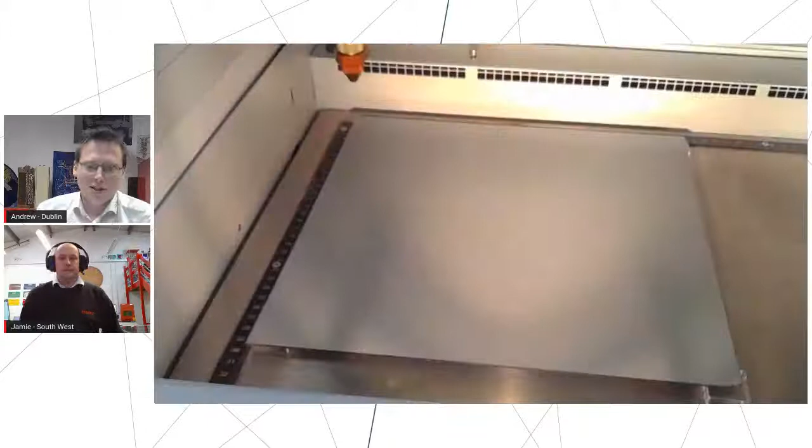Started from the beginning. So this is engraving of a mirror, using a CO2 laser at the start. This is the back of the mirror.

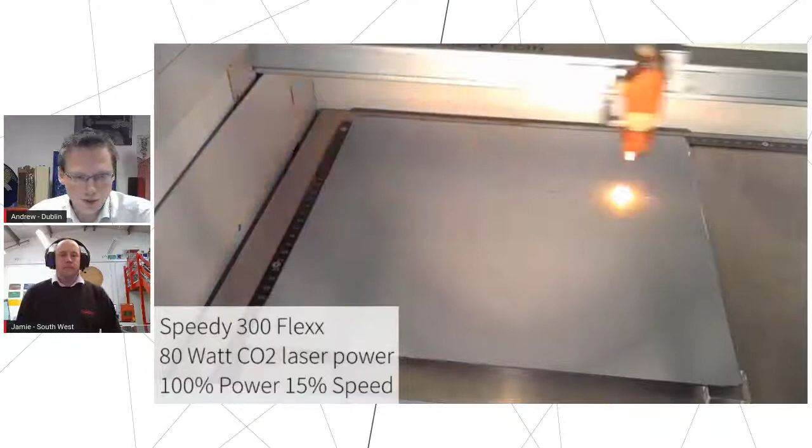Imagine we're trying to remove that surface of the mirror from the back, and then we're going to go through and create this frosting of the glass. There's a fairly big flash there, because I'm using 100% power in this 80-watt CO2 tube and 15% speed. We could probably go a bit faster if we wanted to, but you need to make sure that you're going through that material, because it might not be uniform thickness. So we're just making sure we're going through, and we're having a frosting underneath anyway.

So Jamie, do you want to talk a bit more about the other things CO2 lasers would be used for? Yeah, absolutely. We've run through the mirror here, quite a standard CO2 application - your normals, like Andy mentioned in the materials list, your woods, your papers, your cards. But really today we want to focus on the fiber side of things.

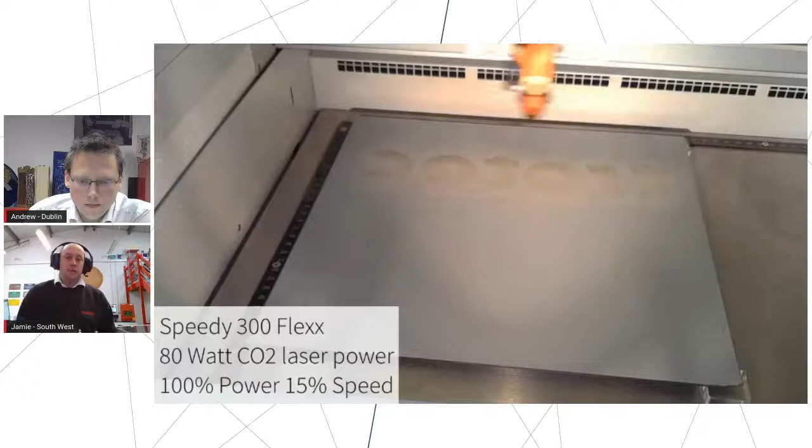As this runs through, Andy will talk through the fiber side of things on the mirror. The frosting on this mirror happens because we're actually marking the glass underneath the metal - we're using the CO2 at the moment to remove the metal content at the back of the mirror to give you a marking on the frosting on the glass. That might be desirable a lot of the time for backlit applications - you might use some LEDs to backlight it, and it gives a nice diffused lighting from the frosted glass.

So there you see it stopped, raised the bed up, and effectively it just turned the mirror over and told the laser to use the fiber laser source. This is using the same lens - a flexx lens - so it will work with both laser sources. You don't need to change the lens.

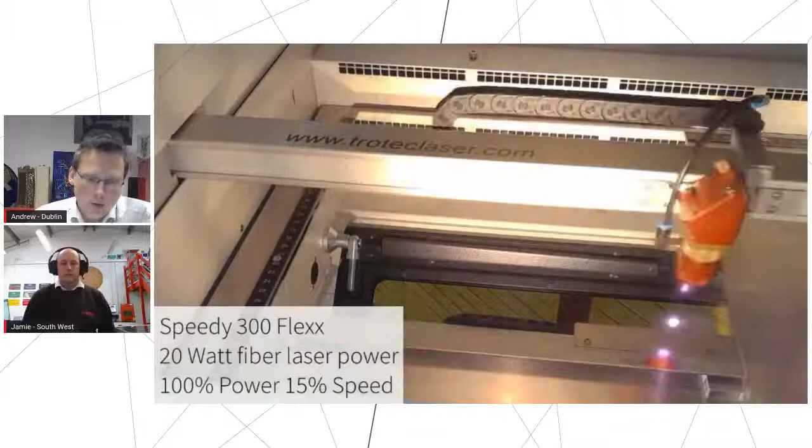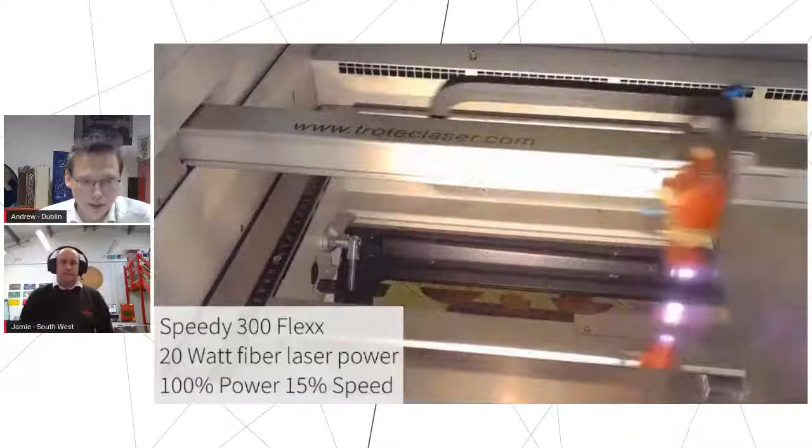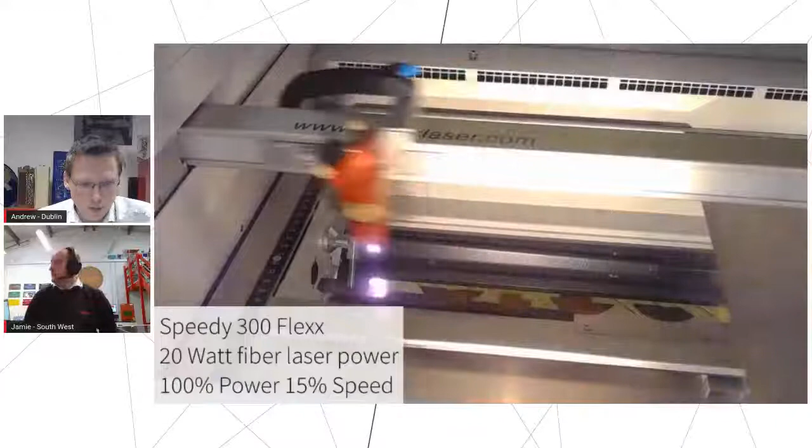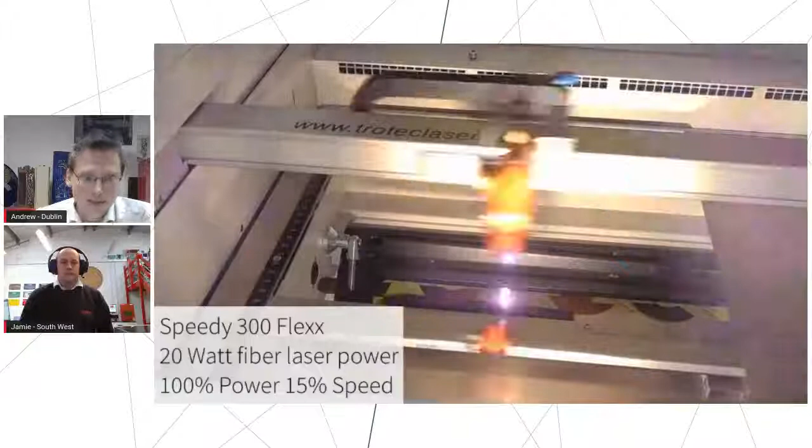With regards to the focal point, generally if you're working on the same height of material, you don't need to change the focus. The machine automatically knows the offset between the two focal points. But on this mirror, I focused it on the top of the glass. When I did the CO2 on the back, I was focusing it on the top layer to remove that metal layer. Whereas now that metal layer has sunk down about 2 millimeters below the glass, so the fiber laser basically doesn't do anything to the glass - it goes straight through the glass and reacts with the metal underneath. So we need to tell the machine to offset it.

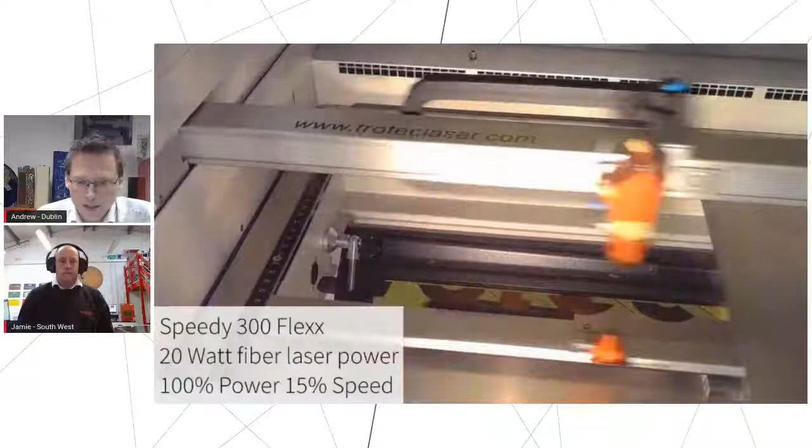But that's all done in the software - we don't need to change the machine or any of the settings on the machine, just the settings in the software change. You can see you're getting a nice big flash with the fiber laser. I used the same power and speed just because I thought it was giving a good result on this mirror - it might change depending on what mirror you're using. I think the only difference was I used 600 DPI on this setting instead of 500 DPI, just because it cleared out the metal layer a little bit better.

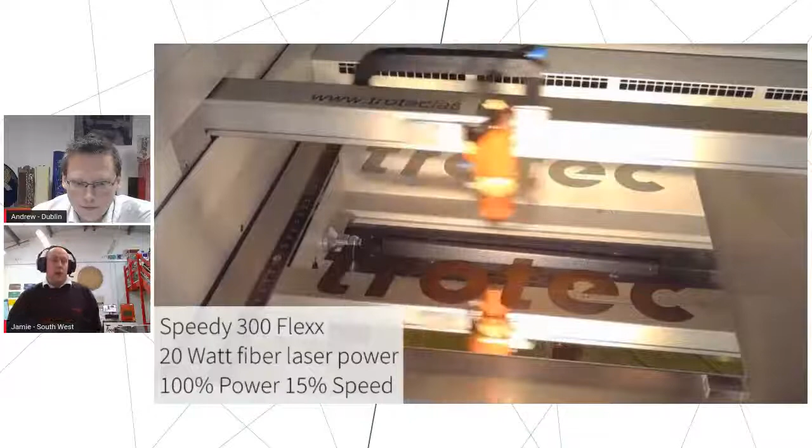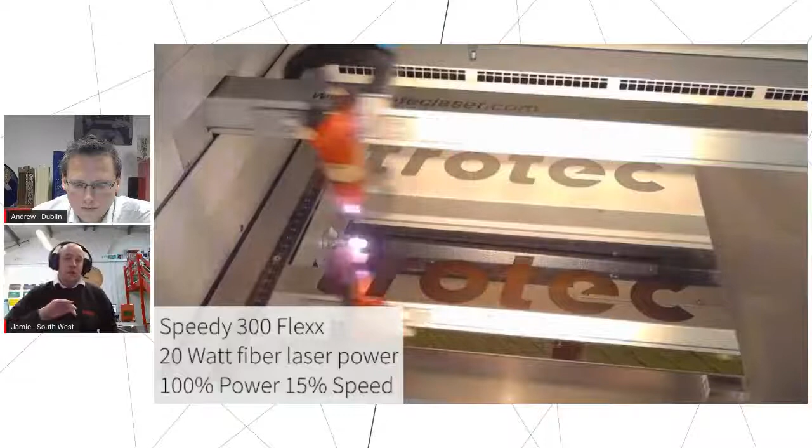I think Jamie, you were saying earlier that the fiber laser has a slightly tighter tolerance on the focus as well. Yeah, absolutely, fiber is really focus critical. As we run through something like this, the application is perfect to highlight that because we're actually going through the glass to remove that metal - that focus needs to be set at the right height to be able to remove the metal at the optimum point. So if you're doing other fiber applications, things like a polished chrome or stainless steel cutlery, where you might have just a slight curvature, you're really limited by the curvature at that point.

CO2 focal tolerances tend to be slightly bigger, allowing us to do a little bit more. So fiber is really, really critical on that focal point.

So I think this video is coming to an end. So I've got the actual sample here, I'll just stop that. There we go. So this is the one I made earlier.

So you see in the reflection there, you can see my camera. So the top part up here is the CO2, and then the bottom is the fiber laser. You shouldn't be able to see too much behind, you can see a little bit - sorry, it's more the wall behind. If I can show you, we're looking at perhaps these bits over here. You can't really see that through the CO2 laser, but you can through the fiber laser.

And usually, if I put my hand at the back, you can kind of see the ring on my finger there on the T. And if I bring it back, it'll go out of focus really quickly with the CO2. But if I put it on the T on the fiber laser, you can see the ring, and you can see it a lot further away - real nice clear finish, and real advantages for that going into if we go through.

Real advantages going through there would be things like if you're going to get paint fill. So if you're looking to add more value to it, paint filling. Also with the CO2 laser, you've got that frosting on the glass, so when you paint fill, you're going to have that frosting in front of the paint when you're looking through it. Whereas with the fiber laser, it clears all of that out nice and clearly, crisply, with a nice bit of paint filling on the back. Really highlights the quality - someone just doing a standard frosted CO2 engrave, being able to add that color really adds a bit more value to everything.

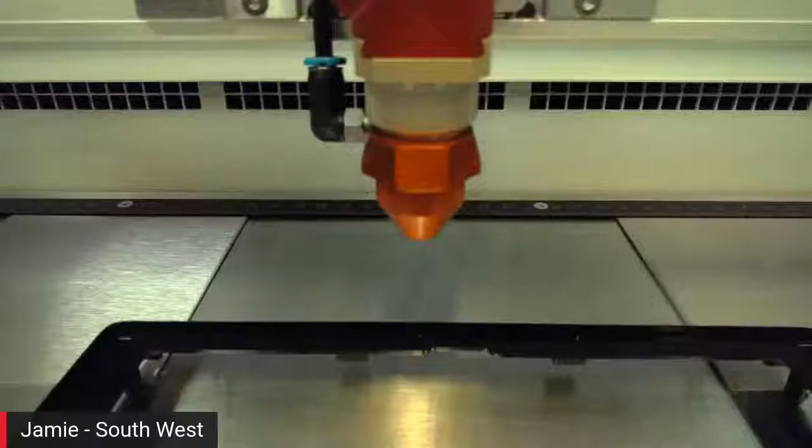So here we are, we're focused into our part. Like I said, I've got a little component part here that actually is part of a vehicle, so just a little part marking here, just for identification. So the laser itself, as Andy was saying earlier, we just have our standard Flexx lens, which is here, gold area at the top, which will allow us to run with CO2 and fiber.

So we just need to focus onto the material itself. Now I've used a manual focus here today, which we have the little tool that just sits on the side of the head, which I'm sure you've seen many a time on our webinars. And I'm just going to bring that material up till it touches our tool. And then from there, I'm just going to press play on our Ruby software, and then we're going to see the plastic being marked first off, like I say, with CO2.

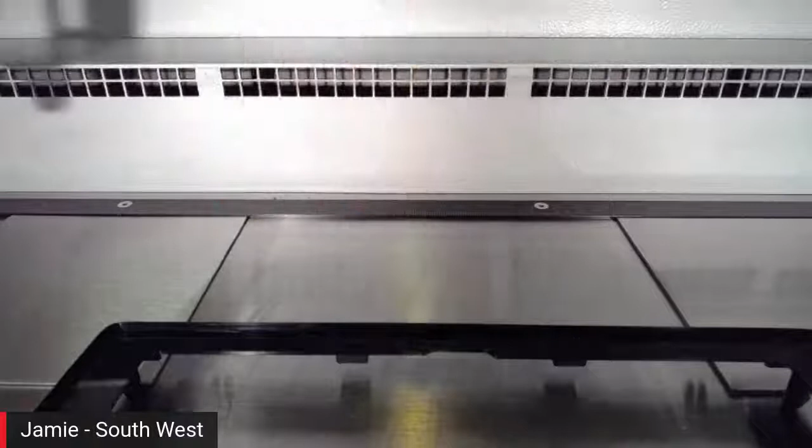And things like ABS here, this plastic really highlights the engraving differences between the two. So as it runs through, what we find is with CO2, it produces a mark that is legible - you get a slightly melted, rounded edge. And then with fiber laser, we're basically color changing that product. So if I lift this up first, you can kind of see if I get it in focus, no real color change - it's gone back to the same color as the plastic itself.

And then what I'll do is just move this across now, reposition - I want to be into this corner. And again, if I just share my screen again here, our job is finished, so our queue is empty. So we're going back into our design area, I'm going to move my job over now, so I'm on this position.

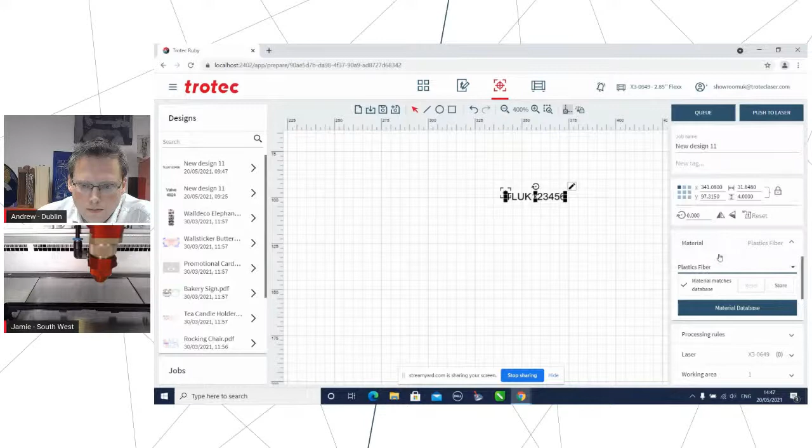And we just need to change it over material - so I started with plastic with CO2, and then what I've done is created a different setting for plastic with fiber marked. So it's just a slightly different setting, nice and simple. And then I'm going to push that over to the laser again and press play.

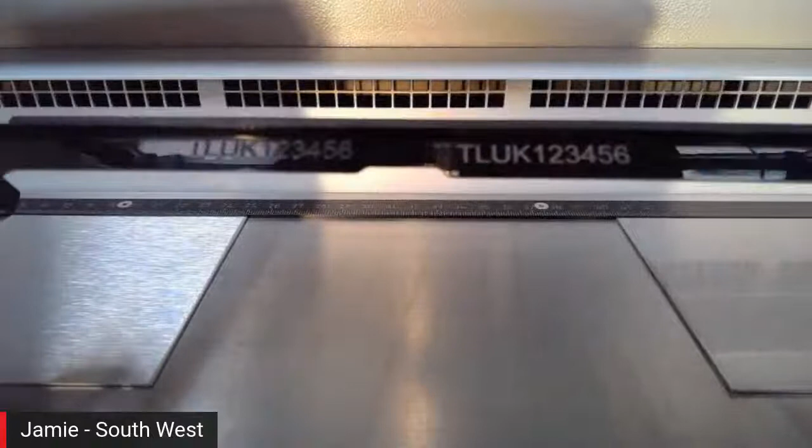So if I again change the screen, there we go, back onto the laser itself, and straight away you can see the reaction. Yeah, that's a much bigger spark reaction, isn't it? Yeah, and then slowly as it comes in - not easy to see here, but I'll now lift it up and show you the finish, and you've got a real nice contrasting mark with a color change.

So yeah, it's not easy to see on screen, but at the CO2 level you get real melted edges, so you're limited when it comes to real high detail or real fine text. But simple sort of part marking here, you see with the fiber laser, really makes a big difference, a real standout. Yeah.

Brilliant, yeah, so that shows a real contrast in the two different results you can get with the different laser sources. You might find that the CO2 laser would be appropriate for cutting that material, but for marking you're going to find the fiber laser gives a much nicer, nicer looking mark.

You also get the benefit with the fiber laser that it's not really removing material, is it, Jamie? It's just a surface change. So you haven't got any issues with the part not being smooth, or dirt getting into that area, with regards to cleaning or sterilization, that kind of stuff.

Absolutely, yeah, it makes a big difference for things like the medical trade who are marking up parts now for ID and traceability, which is a big part of the world nowadays, and it makes a big difference being able to just surface mark it. We're not creating a groove or anything with the fiber laser, so it keeps it nice and sterile, like Andy was saying there.

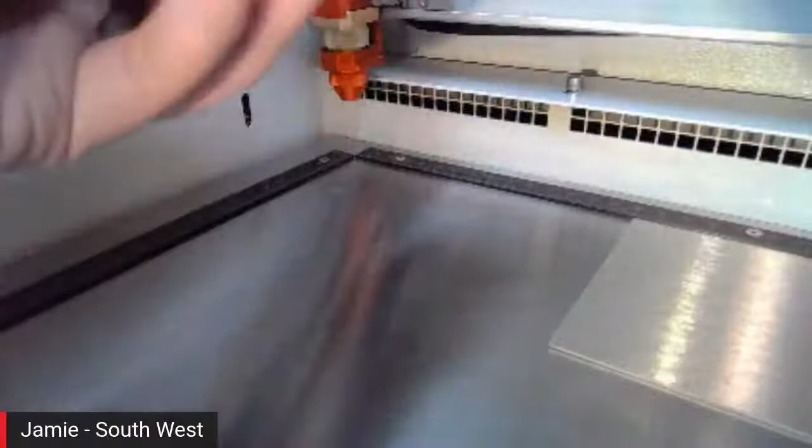So that's already finished. Let's have a quick look at that. So a nice simple tag, again using a polished stainless steel, with a nice quick marking to give you a good fibre finish.

So again, on stainless steel there's a couple of different finishes you can achieve, like Jamie showed you earlier with the ECB logo. So yeah, there's a few different finishes you can achieve.

So really it came down to cost and money, and whether this dual source laser system they could see the return on investment. And at the end of the day, it's always a business decision. So that's what we're looking at.

So we worked out that the average cost of that 50 by 50 bit of steel was 30 pence. This does change a bit, but on average over a couple of months that was the cost of one item. And they were saving about £3.90 per plate from outsourcing.

Again, this is a good idea of how much you might be able to save on outsourcing costs. So in that one job of 600 plates, they were saving effectively per month £2,340. That's effectively what they were making extra by bringing this process in-house.

That's just on the material side. That wasn't including any labour costs, but again they were having to do quality control anyway with the labour, so they didn't find it too much of a difference in terms of what their actual end figure came out as.

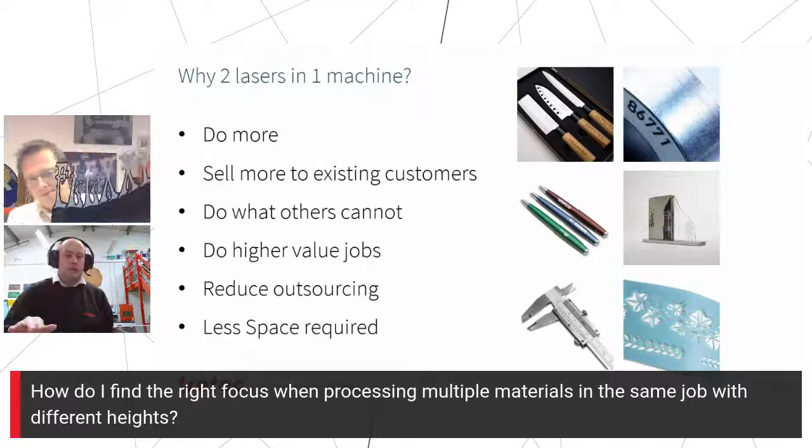However, if you're running through things like the Jimi Hendrix picture we did earlier, which is just on a flat sheet of acrylic, we'd focus on the surface of the acrylic, and the fiber laser would engrave in focus as we are. Then with the CO2, it's a preset determined with the machine to drop - roughly about 5-6 mil to be in focus for the CO2. That's all pre-programmed, you don't need to edit that at all.

It's all the same height, so the offset on the different focal lengths of the two lasers is already in the system, you don't need to worry about that. It's only if your product height is changing that we need to set offsets. If you're running on sheet material, it's all preset for us.